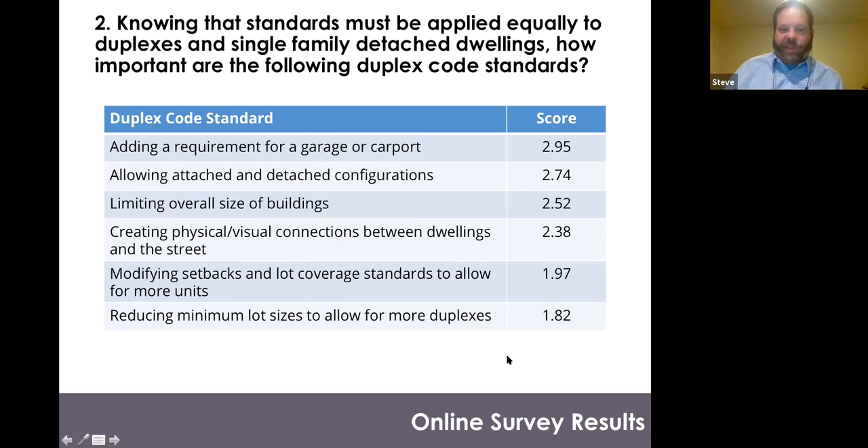Third, limiting the overall size of buildings falls somewhere in the somewhat to important range for people. On the bottom end of our scale, modifying setbacks and lot coverage standards to allow for more units, and reducing minimum lot sizes to allow for more duplexes. So there's a bit of conflict in that we're hearing the desire for more affordable housing, but not for changing standards to allow more units on parcels. We'll see these themes going forward.

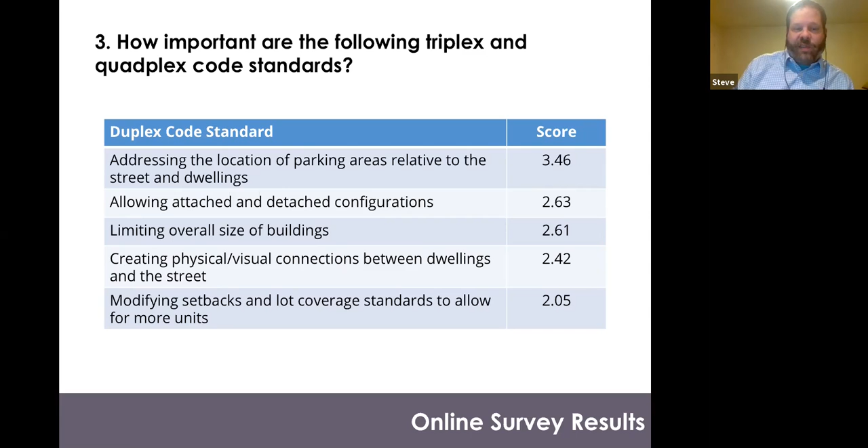Number 3, how important are the following triplex and quadplex code standards? Again, at the top, addressing the location of parking areas relative to the street and dwellings - where are parking areas relative to the street and relative to dwellings. Less important, allowing detached and attached configurations and limiting the overall size of buildings. And then towards the bottom, the least important, modifying setbacks and lot coverage standards to allow for more units. We're seeing some themes emerge.

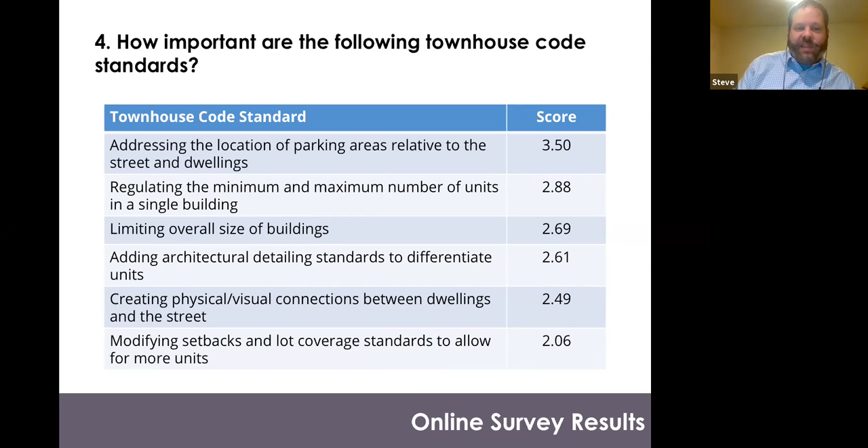Townhouse code standards. Again, far and away the most important code standard is addressing the location of parking areas relative to the street and dwellings. Also, here's a new one we had for townhouses: regulating the minimum and maximum number of units in a single building. And again, limiting the overall size of buildings. Way down at the bottom again, modifying setbacks and lot coverage standards to allow for more units. Let's go to the next one, Elizabeth.

Cottage cluster code standards. Again, with a score of 3.5, providing options for shared parking or parking close to each cottage - so where is that parking located relative to the units. And then down towards the bottom again, modifying setbacks and lot coverage standards to allow for more units. Somewhere in the middle, things like orienting cottages around a shared courtyard, limiting the overall size of buildings, creating physical and visual connections between dwellings and the street. I think that's the last one.

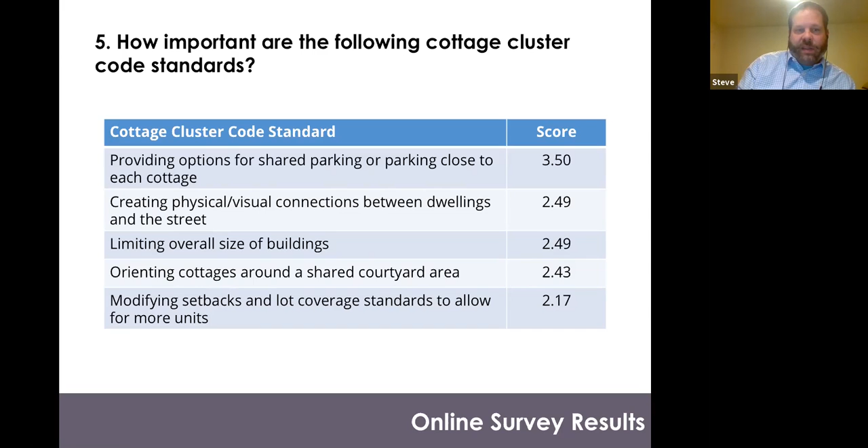So, I would just say before Elizabeth starts, in summary, we always are dealing with tensions in how people feel about these issues. While we see that there are many people for whom providing more affordable housing options is important, they're also very concerned about how that's done, particularly how parking is accommodated for these newly allowed units, and being thoughtful about how many units are allowed or what changes are made to the code to allow for more units.

Heather, Elizabeth, you looked at these results as well. Is there anything else that jumped out at you in terms of themes that I might have missed? I think you nailed it as far as parking being the thing we heard the most about. And then in the comments also, which were numerous, parking came up more than anything else. But I think you definitely, from my perspective, gave the gist for sure.

Yeah, the only thing I would add is that we used the survey tool as an educational tool as much as anything. So what you don't see in these results is all the background information we shared about each of these housing types. Even beyond the specific answers we got, what we were really hoping came out of this survey, and why we're glad 192 people took the time to go through it, is that they're that much more familiar with what middle housing is and what we need to do.

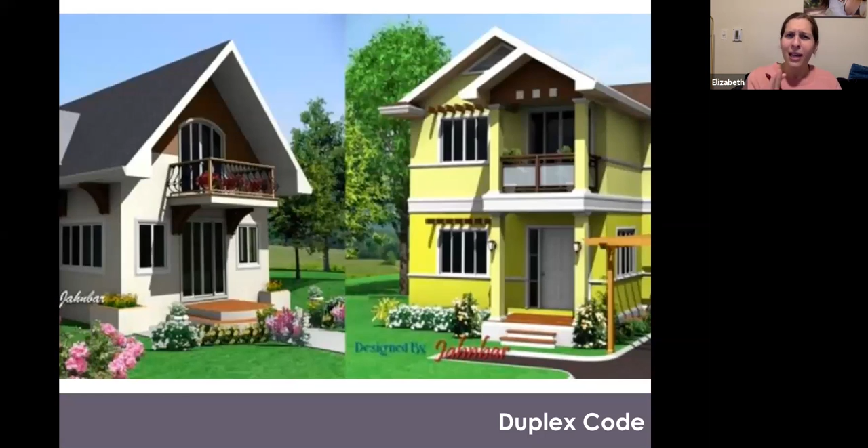I apologize, it's actually really hard to find graphics explaining this difference. So on the left you see 1.5 stories compared to 2 stories. We're talking about imagining a whole extra story underneath this, but you can kind of see the difference if you focus on the top here. The one on the left, the reason I included it is that it kind of gives you an idea what a quote unquote half story looks like, because it can be tricky to imagine.

It's like that movie Being John Malkovich, where they have that weird in-between story and everybody has to bend over. It's not like that. It's more just about using some of the space under the pitched roof, so you don't necessarily have the full story in terms of the floor plate. You have just the inner area under the tallest part of the roof, compared to, say, on the right, where you've increased the height enough so that there is room for a full second story that has the same floor plate as the first story.

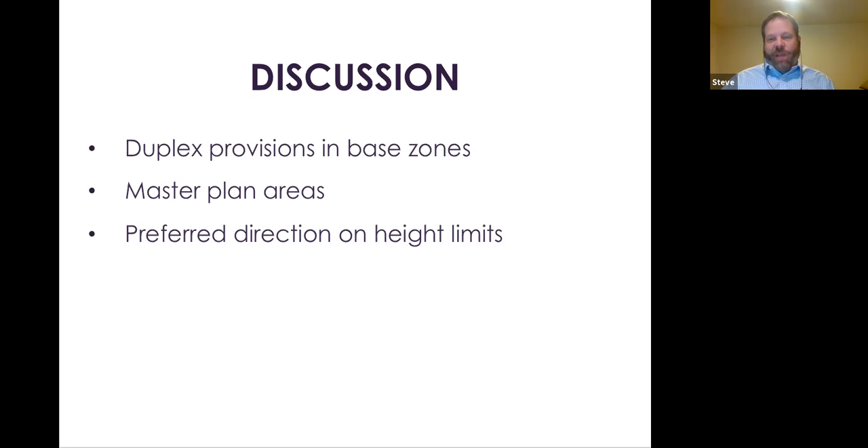If no one has any comments that they jotted down during the presentation, Elizabeth, maybe we should go back and just walk through those slides and see if people have any questions or comments on each one. Sure, anybody want to start?

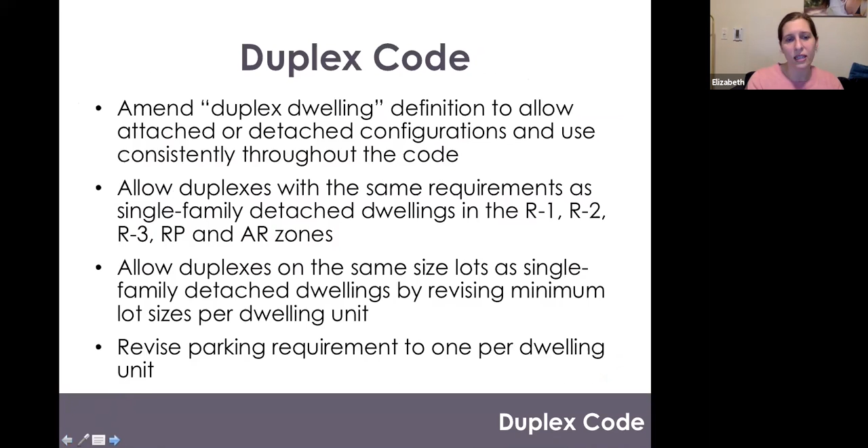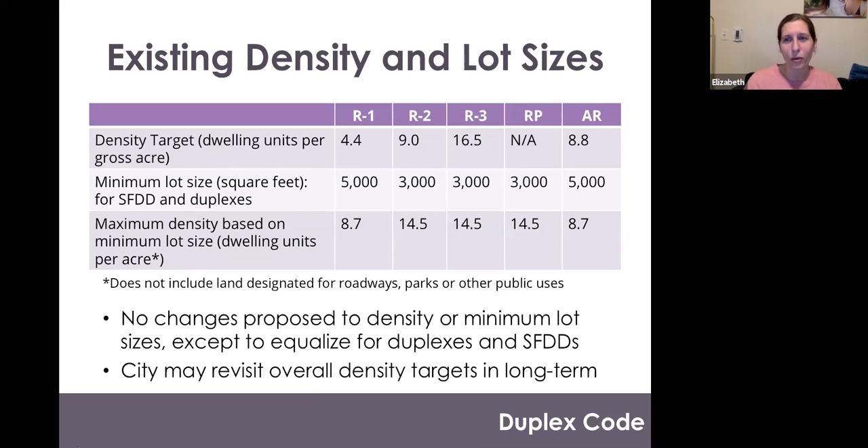Just the basics of where we're going to allow them, the lot sizes, and the density issue. I know this is kind of complex, but we put it in just to show we did the work. The answer is really in this middle row here: the minimum lot size for duplex will now be set at 5,000 square feet in R1 and AR, and 3,000 square feet in R2, R3, and RP.

So, Elizabeth, I might just chime in if I can. Please do, if that's okay.

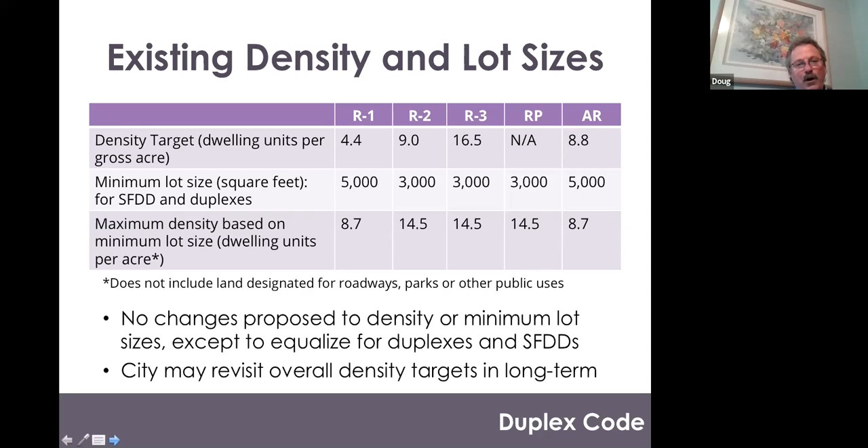For the committee members, think about if you were in R1, what we're typically seeing is homes in the 2,000 to 2,400 square foot size. They are meeting our lot coverage requirements for the home and the driveway. Now imagine if you had a duplex on that same 5,000 square foot lot. You'd effectively have a duplex ranging from 1,000 to 1,200 square feet per unit, instead of a 2,400 square foot home, if you're considering the lot coverage piece. We're not getting into the design piece, but that's a way to contextually think about what that building envelope might look like in the future. And of course, designers get really creative about what they look like from the street, that curb appeal.

Okay. Anybody feeling brave and want to talk about the master plans?

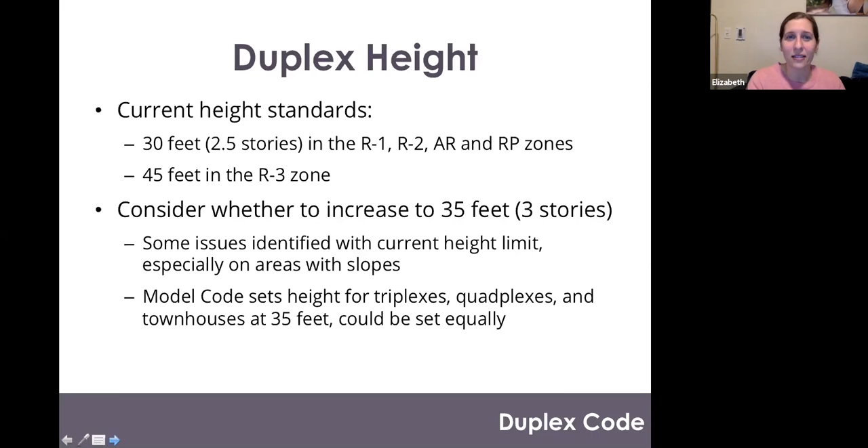Okay, I'm trying to understand all this. The reason for a height maximum is, I live in Oak Knoll in Newberg, and I know that since we're all on a hill, if somebody builds taller, you ruin someone's view in the back, right? I assume that's the pushback for why there's a height limit. Is that part of the reason?

Yeah, that's definitely part of it. And also a sense of literally overshadowing people's backyards. So height limits are about controlling that building envelope and keeping it at a, quote unquote, traditional neighborhood scale.

But raising it gives the developer more options, maybe more affordable housing options. It's interesting to think through whether it would actually be more affordable, because in some ways, if you added an extra 500 square feet of living area, it could actually be less affordable, since it's more house. But it could make a project pencil that wouldn't otherwise pencil. I don't know what the market is for 1,000 square foot duplex units. Maybe they'd make good rentals, maybe people would want to buy them as a condo or something. I really can't speculate on that, but I think the idea is just that it would add more flexibility and make projects at a variety of price points more feasible, keeping them within that overall lot coverage that's already in the code.

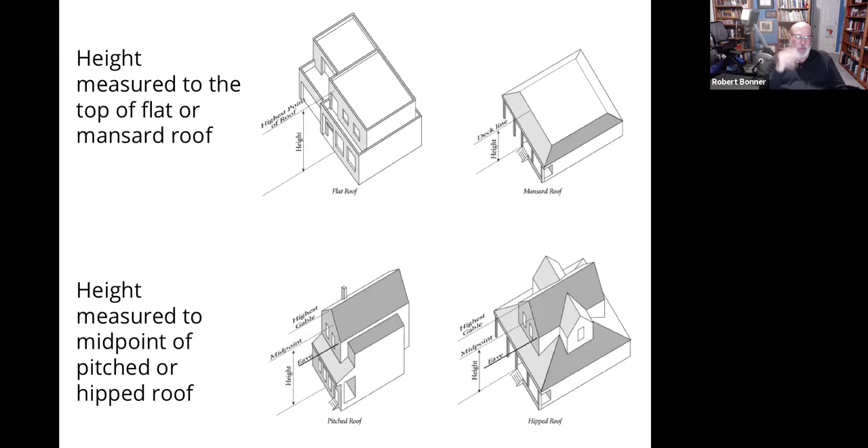Yeah. Well, see, as I'm looking at it, if we allowed a 35-foot roof, as we do in some residential areas, one of my concerns is that we would see more of the higher end housing rather than the affordable housing that we'd want. That's just a concern.

Yeah, it is worth considering. I think we can look and see if there was any work done on this at the state level about potential impacts on sizes and prices, and get back to you on that.

I think the difficulty in writing zoning code is that we want to nudge people in the right direction, but the zoning code isn't a great tool for that. Sometimes we maybe want to restrict something in the hopes that people pick this other option, and it might work, but if it doesn't work to develop those smaller duplexes for financial reasons, we're not going to convince anybody just with the zoning code. We just might cut off any hopes for duplexes.

Again, I'm not saying that's what would happen if we kept the 30-foot height limit. I really don't know, so I'll see if I can find any more financial details about that. I know there was modeling done, particularly on triplexes, that had to do with the total amount of building area. That could be useful and relevant here.

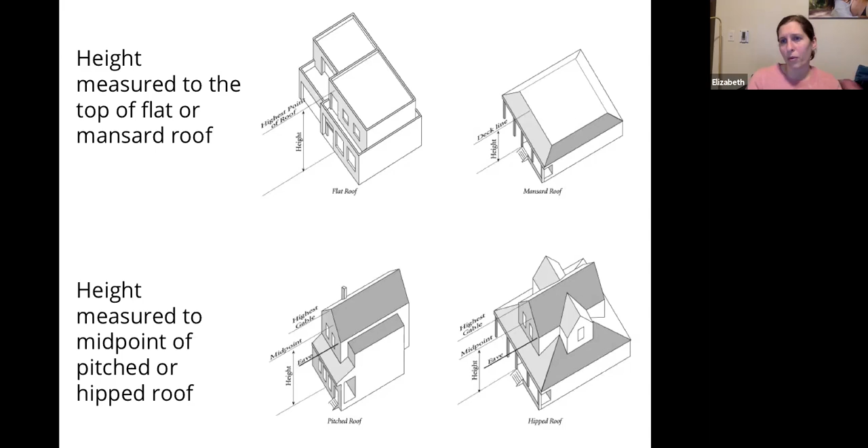Another thing I'm thinking, and I don't want to get into this in detail now, but maybe something Doug and I could follow up on is how we measure height—whether it's from average grade, highest grade, or lowest grade on site. If the biggest issues seem to be moving up the slopes, maybe we could look at how we set the grade from which height is measured and change some of the definitions to address those areas more specifically. That could have more limited impacts on infill sites, for example, where the height limit wouldn't necessarily change and could be less affected.

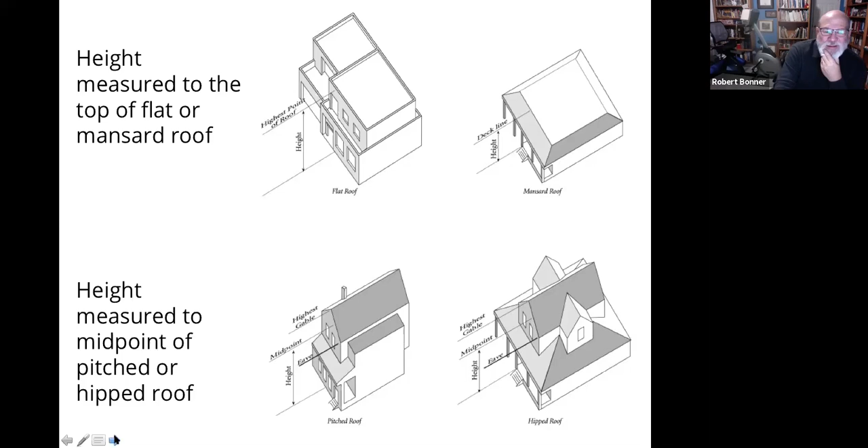And if we look at it, 5 feet is not much difference between 30 and 35 feet. Right, the 5 feet is not the difference, but the third story is the difference. It only takes 5 more feet for most residential developers to get a full third story, which can be a big change in terms of visual impact from a 2-story development.

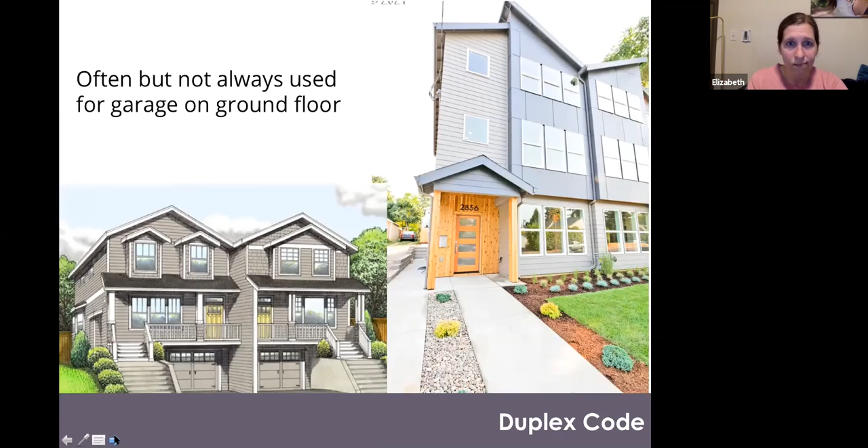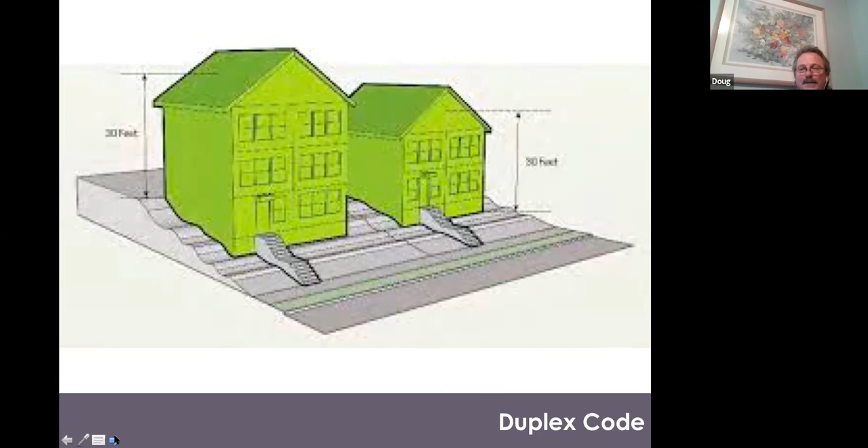Elizabeth brought up how we measure, and currently our building code, the Oregon Structural Specialty Code, has a definition on calculating structure height, and what we use in our code is that same methodology.

Okay, well, any more thoughts on height limits before we move on? I'm hearing a lot of interest in really thinking through how it could impact housing. That's what's exciting about zoning—not just the numbers we put down on paper, but how it impacts development on the ground.

Okay, let's let that percolate and move on to design standards for other middle housing types. What you had in your packet was the draft code for duplexes. As we explained in the memo, that code needs to be adopted in a separate package before June 30th of this year, so that will finalize based on some of this input and further discussion with Doug. We'll bring it back to you to confirm, but that's pretty well set.

Now we really get to the bigger piece of the code work: bringing in the other middle housing types. We'll do that as a separate code package that goes on top of the duplexes, adopted through a separate process after June that the city will be leading. I think the target date is fall, but none of us have to hold Doug to that.

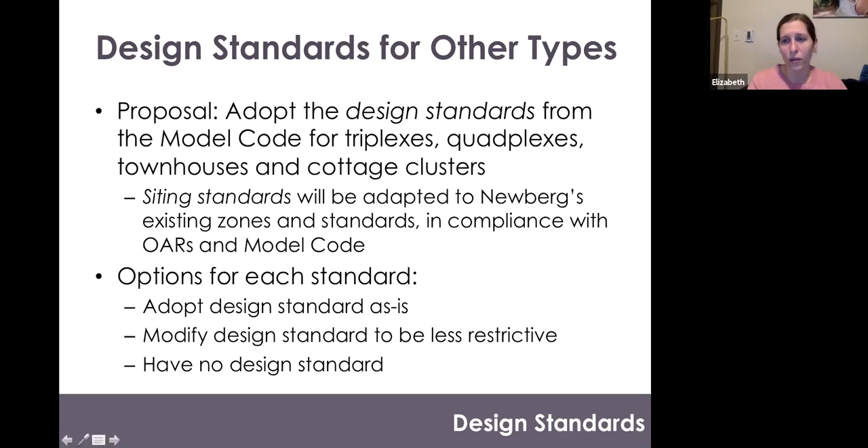So we're not necessarily going to recommend this final option of having no design standard, but we just want to say it's certainly out there if you think anything is too regulatory. Okay, so we'll start first.

Our goal is really just to walk through these tonight, get your initial feedback, and then we'll use them to shape that draft code—so you'll get another chance. For triplexes and quadplexes, we're going to be looking at entry orientation, minimum window coverage, garage and off-street parking areas. We certainly heard in the survey how important that is.

So we'll talk about the ability through the model code to regulate those, and related is the driveway approach piece. Okay, so these diagrams that I pasted in here are from the model code.

These address the entryway orientation. What the entry orientation standards say is basically you have three choices. Your main entrance can face the street and be less than 8 feet setback from the main facade of the dwelling. That sort of helps these new dwellings pass what I call the trick-or-treat test—can you find the front door in order to knock on it, in order for your kids to knock on it to get candy on Halloween?

And if it's set too far back or tucked around the back, that house does not pass the trick-or-treat test. So they think that if you don't set your door back by more than 8 feet, you'll pass. The other option here is to have your main entrance open onto a porch, and then the entrance itself doesn't have to face the street as long as the porch is facing the street.

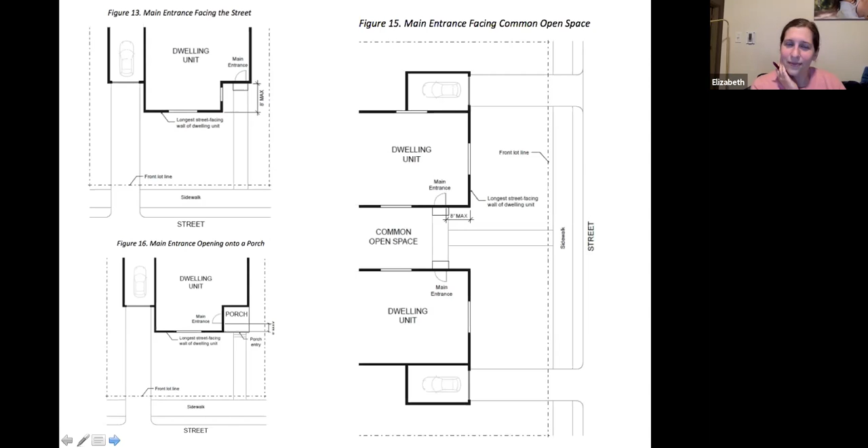The next piece is window coverage for triplexes and quadplexes. My biggest beef with this particular diagram is that the total window coverage they're showing appears to greatly exceed 15%, so I think it's a little misleading. But the point is that all of the street facing facade, you define that facade area, and of that, up to 15%, you can set the minimum for window and entrance door coverage requirement.

So again, I think this is pretty reasonable. 15% for residential uses, it's not very common to exceed that because of privacy concerns. Things like, what if you have a bathroom on that wall? You don't want a picture window necessarily. So I think this is pretty reasonable.

Just for comparison, we don't apply any minimum window coverage to single family or duplexes, and we see generally sufficient window coverage for those. So I think this should be relatively easy to meet. But it still serves an important public purpose, making that visual and physical connection to the street, adding some eyes on the street, and just neighborliness.

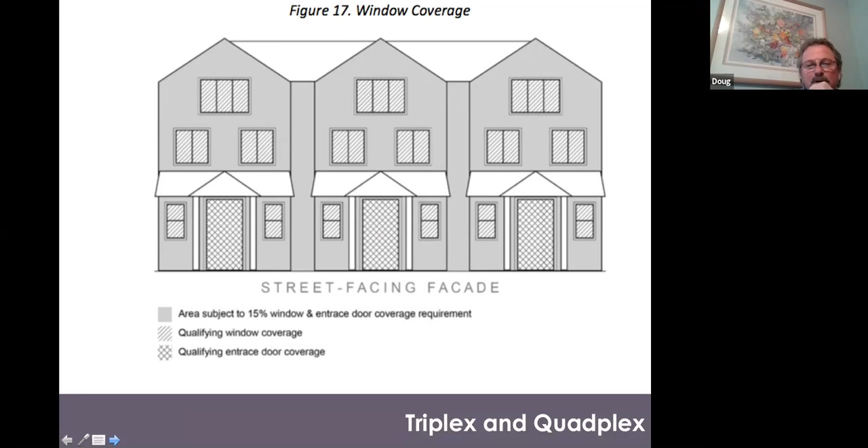Yes, and the other thing I was thinking, when you have the attic style top floor, you can always use sunroofs. Is it? Yeah, skylights or whatever you call them. So yes, that's how to get enough daylight in.

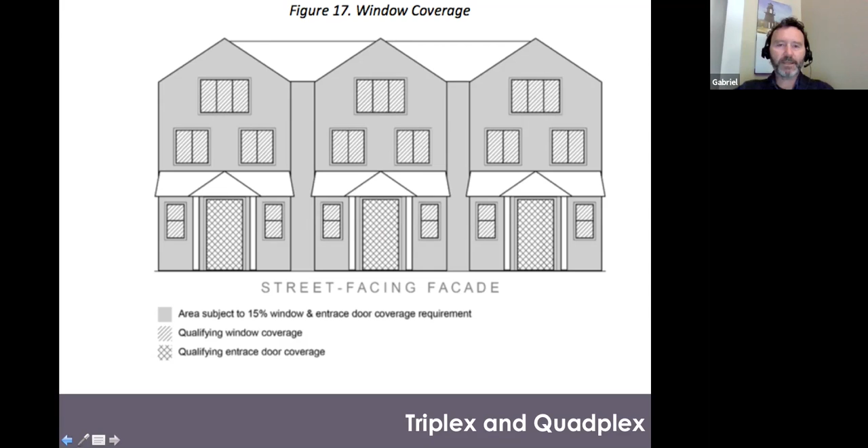Okay, and then we get to the width of garages and parking areas. This definitely ties into the concerns about whether parking dominates the site. It's a fine line, since we've heard this desire to make sure that all of these units have parking.

And again, spoiler alert, we'll probably be drafting the code to have 1 parking space per unit be required for these types, which is the most that can be required under the state regs. But if you are going to require that parking, it needs somewhere to go, but still without dominating that front facade. When you get into that window coverage, you still want to have opportunities for windows facing the street, and you still want to have the entrances facing the street.

So to balance that, the model code standard is that the combined width of all the garages and driveways on the site, represented by A1, A2, and A3 here, can't total more than 50% of the front facade of the total street frontage, or lot width, on the property line. So that's the balance that they've come up with.

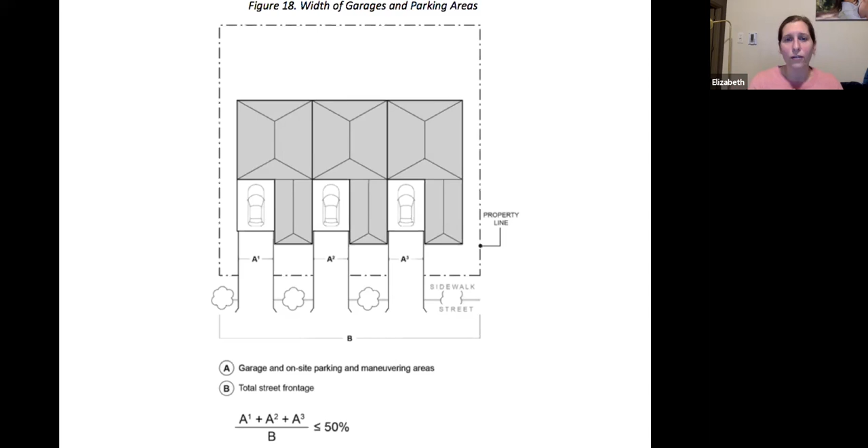So I think here, if you wanted to be less restrictive, you could allow for more driveway and garage coverage, but not less. The idea is that 50% balances the feasibility of providing these parking areas against requiring as much of the unit itself and the entrances to be up near the front of the property.

And I would say, I think that fitting these driveways in is going to be one of the key challenges for sites. So I think this could be a really important driver of site design.

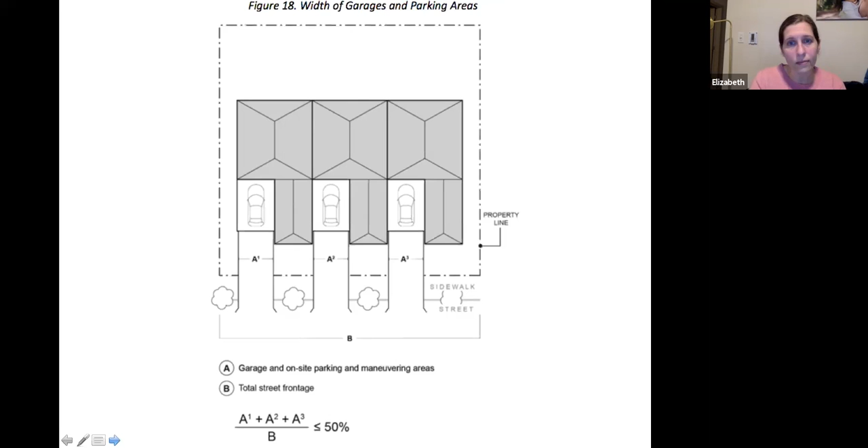Okay, and it is related to how wide the driveways can be at the street. In many cases, like in this diagram, the width of the driveway on the property and the width of the driveway opening are going to be the same. But sometimes you see a narrower width at the street that flares out to a double wide driveway on the site. This standard is particularly concerned with the width of driveways at the street and works in concert with the previous standard. What this says is you cannot exceed 32 feet combined of driveway access onto the local street per triplex or quadplex.

So 32 feet per frontage - I don't know if you could actually fit 4 driveways with that, more like 2 16-foot wide shared driveways, but that is the recommended standard.

I do have some questions here about whether Public Works would allow this, to have 4 separate driveways from one lot accessing the street. A lot of city codes don't permit that. So I think here's where we're going to need to think about whether shared driveways need to be either mandated or heavily encouraged by limiting some of the other options. But this is what the standard is initially promoting.

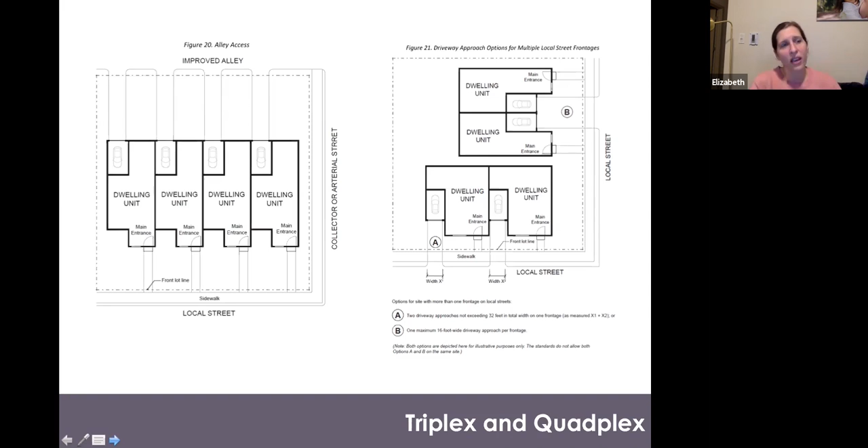Sure, so the reason that it's different is because there's different ways to answer the question. My first answer is because Newberg doesn't regulate how wide garages can be for single family detached homes, it can't regulate how wide they can be for duplexes. The idea is that those two types are supposed to be regulated the same. So perhaps this prompts the question that maybe you would like to add, or at least look at some regulations for single family homes and duplexes about how wide garages could be as part of the facade. But that's why we were constrained there.

But as we get into these other housing types, DLCD and the rulemaking committee recognized that there are different design challenges that come with these plexes. And so the design standards that are in the model code are really additional tools that they're giving to the cities, saying, hey, you can add these additional standards. You don't have to apply these to your single family homes, but you can apply these to your plexes, because we realize there's going to be more challenges, so that you have a way to try to address the compatibility issues.

Yeah, so in our code, it's kind of a quirky thing, and maybe we can fix it through this process to some degree. If you go to our definition section, it says that a double car garage has to be 20 feet by 20 feet, interior wall to interior wall. For a single car garage, it has to be 10 feet wide and 20 feet long, again from interior wall to interior wall. It was an odd thing when I first got here and I looked at that, because people have missed it, and there's a question about whether some single car garages in either single family or duplex developments meet those standards or not.

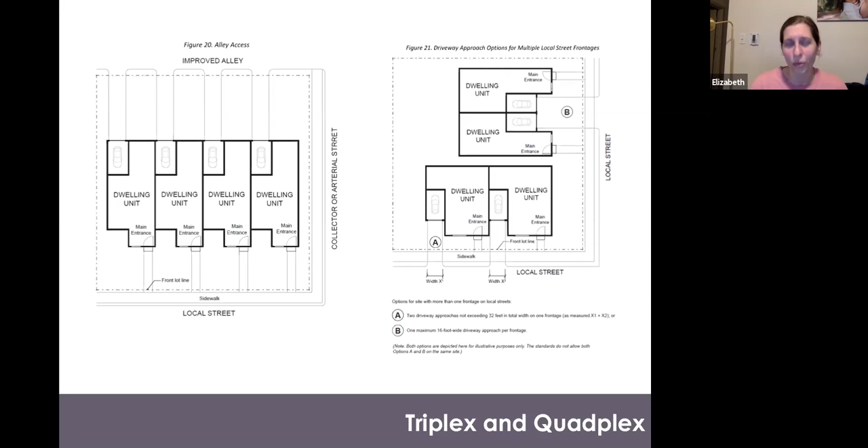So model codes are good to a point, but there are lots of nuances that come in with them. But the point is that there could be alley access - the model code is taking a stand that cities cannot require only alley access as an option for these sites because of this whole cascade of impacts. So it's an option if you want alleys, but it can't be the only way to develop these sites because of all those issues.

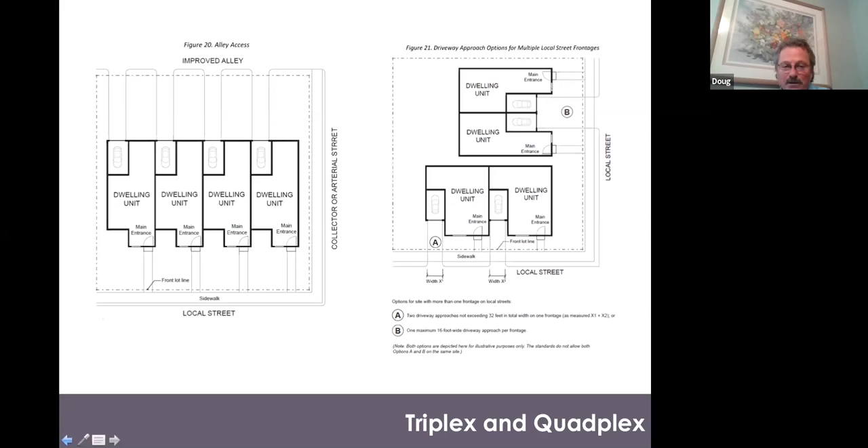We also have to take into account vision clearance triangle requirements at street intersections. The code currently has some driveway separation distance requirements, which is part of our engineering side, so we'll have to talk to them about that, and whether we need to make modifications for triplexes and quads.

The last piece before we move on is the spacing of these driveways when we talk about parking. We do want to get this off-street parking that we'll require, but the more driveways you put, if they're too close together, you completely eliminate any on-street parking - so it's really a net zero gain of parking spaces if you do it wrong. We'll want to look at ways to maximize both retaining on-street parking while getting this off-street parking.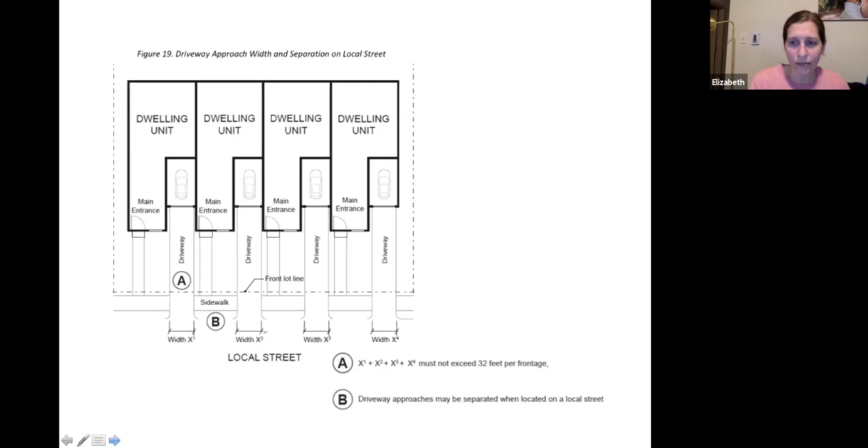Okay, I feel like we've talked about some of these issues already, but one more discussion point on plexes before we move on.

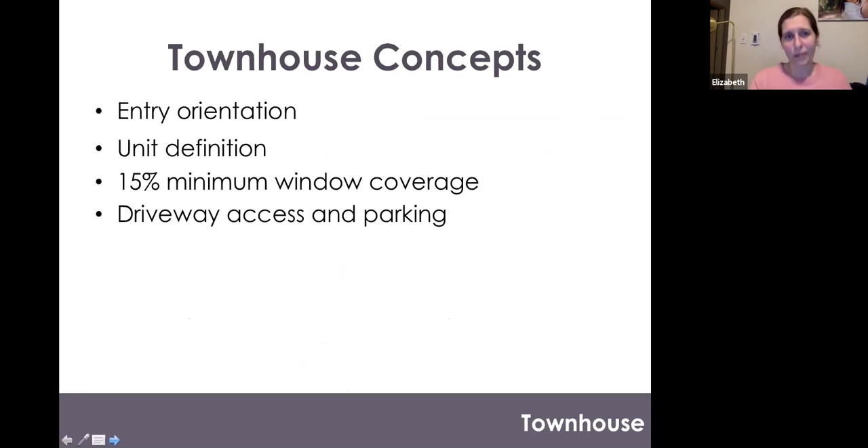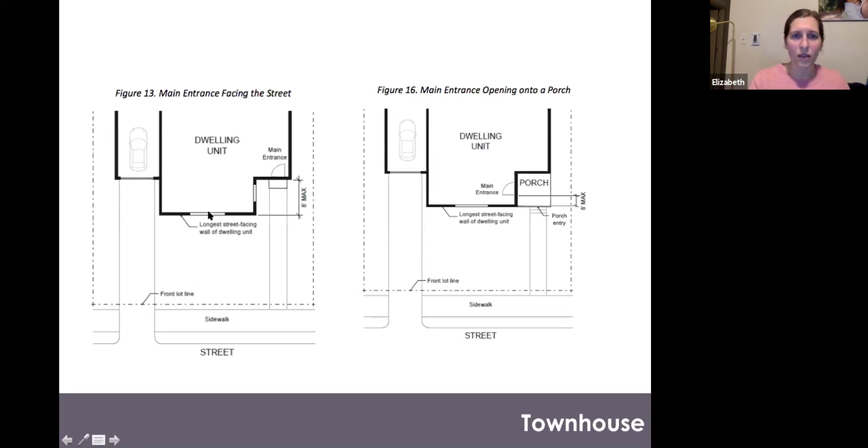Let's get into townhouses, which are actually pretty similar, so you guys can start to feel like experts. As we saw in that visual tour, a lot of townhouses look pretty similar to side-by-side attached triplex and quadplex units, so very similar design issues. The entry orientation has the same standards - you can either bring your entrance up within 8 feet of the street-facing facade, or open onto a porch.

This is where you get a little bit of an opportunity to regulate bay windows and things like that - there's an option to require one unit defining feature per townhouse, and they've listed them out, A through G: roof dormers, balconies, bay windows, facade offsets, etc. So we'll add this menu approach, and each unit can have one. In the diagram, several units have more than one, so that's certainly permitted, but you can only require a minimum of one.

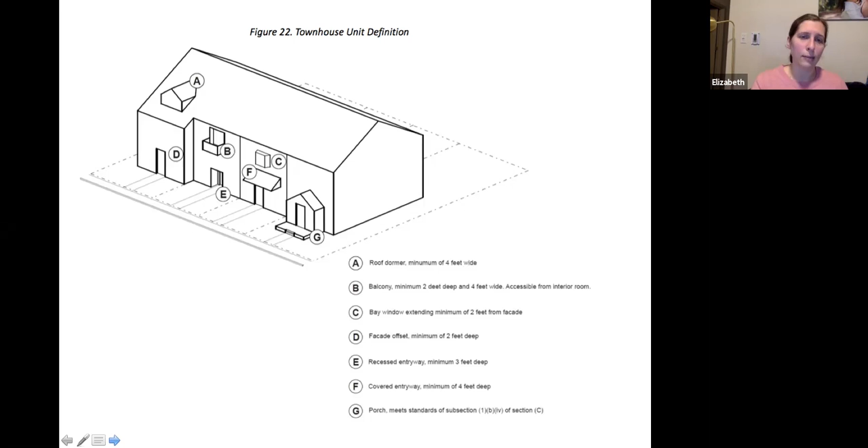Then we've got the same window coverage, same drawing in fact, about 15% for the townhouses. And then we get into very similar parking issues. The difference is that because they're on individual lots, sometimes the engineering standards are different, because a lot of times each lot is guaranteed one access. So that's how the model code approaches townhouses.

Similarly, some cities have said - I've certainly been in cities, or worked in cities, back in the day I used to actually travel to cities - there's certainly city codes where they say if your lots are below, say, 30 feet wide, you have to have alley access.

And that triggers that whole cascade of impacts and costs that we just talked about. So what the model code is saying is they want to guarantee an option for street access to driveways and parking. And what they're saying for townhouses, to maximize feasibility, is that any lot that's at least 15 feet wide, which is probably going to be most of the lots,

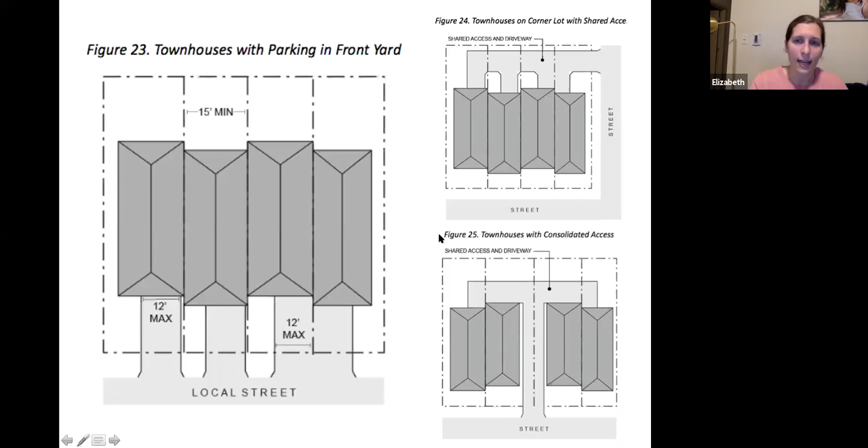So there are, of course, a few other options. If you're on a corner lot, these ones on the right here, there are some options for shared access or a consolidated access way. But these ones can only be required if the lots are less than 15 feet, which, I don't know that we're recommending any lots reducing the minimum lot width below that.

Okay, so thinking through there, any questions, comments about these, either modifying or limiting any of these standards for townhouses?

Okay, well, I think everybody's overwhelmed, Elizabeth. It is so much. So again, this is your preview. So, anything you want to say now helps. And even if it's just a question of, wow, that looks great, or that sounds terrible, or how is this going to work? Any of those are welcome right now. But also just to give you a preview of what we're thinking as we're interpreting this.

Last one to go through with you is talking about the cottage clusters. And these are the challenging one, just they're always the last in the series. And I think, frankly, even the model code, you can sort of tell that people got tired by the time they got to cottage clusters. And it's the most unlike the other housing types. So as you can see just from this list, there are the most options for design standards here.

And I do think that most of these pieces are going to be important to make a cottage cluster work. But I would just also, as an overall caution, remind the group that cities that have had cottage cluster standards in the past have generally overregulated. That has led to the production of zero to few cottages. So I think the model code has done an admirable job on cutting back, but there could still be some opportunities to be selective about some of these pieces.

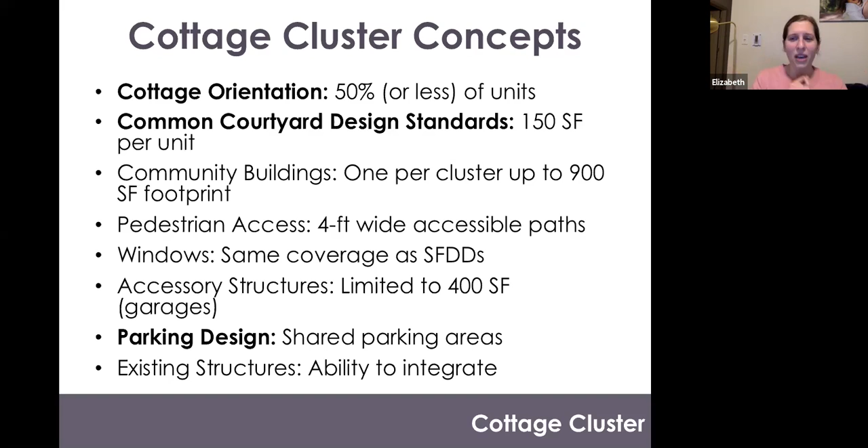Then the last piece is the parking design. The model code started, as the conversation went, by requiring parking in some shared parking pods, separate from the individual cottages, and they have relaxed it a little bit to envision more what it would look like with garages for each cottage. We'll get into exactly how feasible those might be.

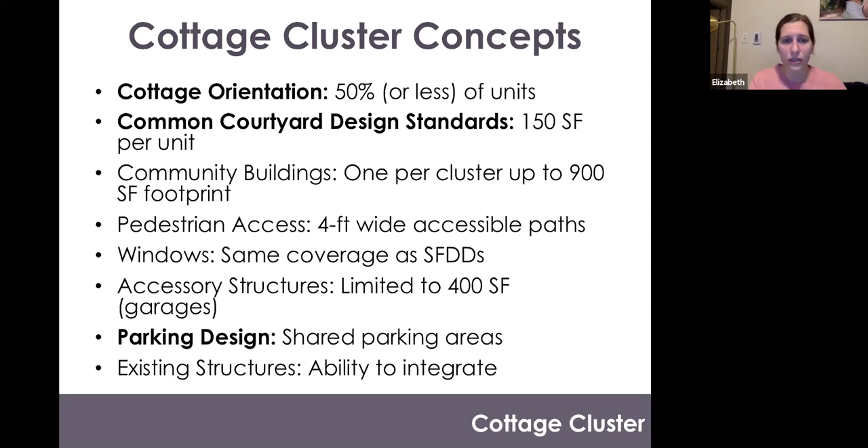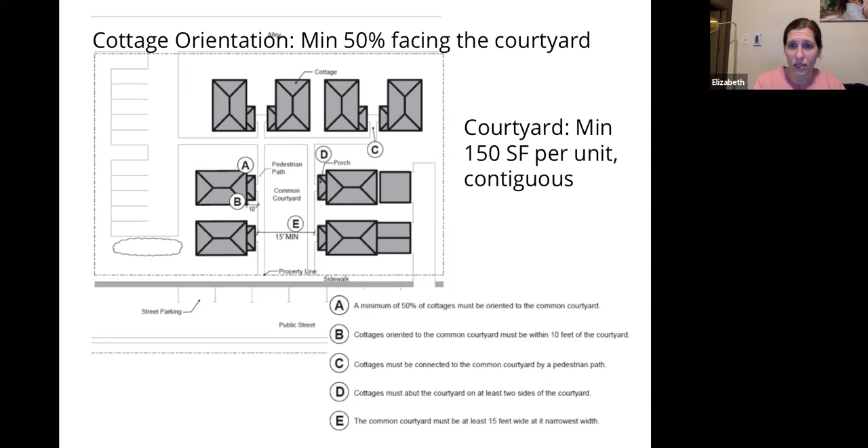Now to talk about the parking. The piece on the left is this shared parking area with individual parking spaces. In this case they're surface parking spaces, but it could be a carport structure or a shared garage instead.

The model code has what I think are fairly restrictive standards on how these have to be arranged, which could really eat up an awful lot of site area and decrease feasibility, cutting into the density that could be achieved otherwise with these cottages. First, you can only have 5 spaces before you have to have a landscaping buffer, which is pretty restrictive—a lot of codes for other types of parking lots allow at least 10 or 12 spaces before you need a landscape buffer.

It has to be set back 20 feet from the street, screened with landscaping, and set back 10 feet from any side property line. All those pieces are great in terms of reducing the visual impact of these parking areas within a neighborhood. But I don't think this diagram is to scale, and when you start thinking about how much land area is getting eaten up by buffers and boundaries around these shared parking areas, I really have to question how feasible it's going to be to site these.

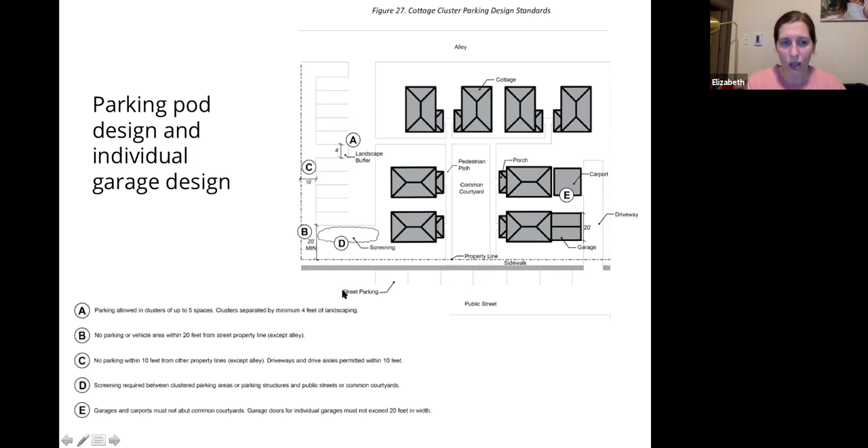Okay, Mom, the phone's not working. It's not on its side. All right.

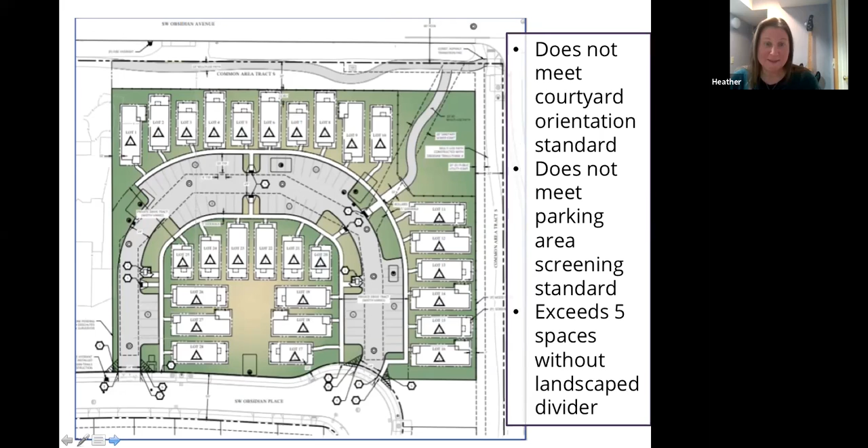And here parking is also a lot closer. We've heard it's hard to get your groceries to your home when the parking area is all in the bottom right corner and you live in the top left corner. So having parking dispersed throughout the site can be really helpful to residents as well.

Great, good coverage, Heather. Thanks for that pitch hitting.

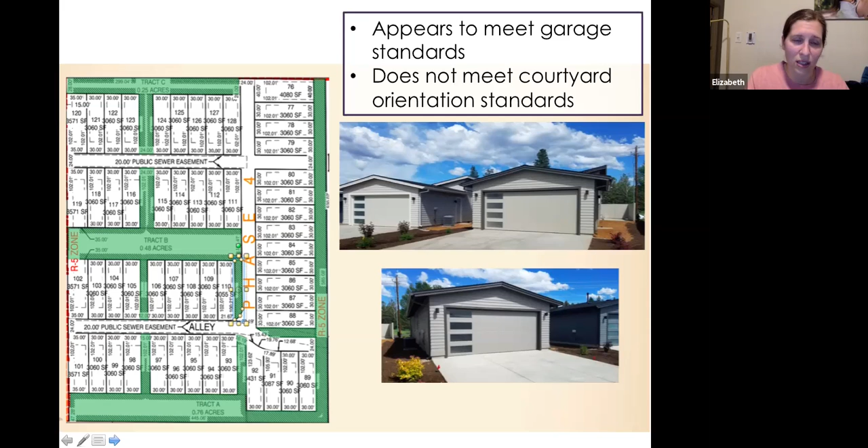So we'll turn it over for anybody that isn't completely exhausted thinking about code, for any more thoughts about cottage orientation, the common courtyard design, parking design, or any questions on these other pieces. I'm happy to talk about them, but I think they are less important in terms of feasibility.

I kind of feel like if what you're saying is that for these cottage clusters the courtyard is the point, for people to be facing into those or have easy access to that, then those last two examples just make things confusing. I'm all for flexibility, but why try to fit them into a box they're not? Maybe call them something else - they want more density, yet freestanding buildings, but it doesn't seem like a cluster to me. For people not going through this kind of process, it's going to be even more confusing. But maybe it doesn't matter - it's just the developers that need to understand it.

Yeah, I think you raise a good point. What are we trying to accomplish with these cottage courtyards or cottage clusters? If it's really just a small lot subdivision, that's not necessarily a cluster. HB 2001 creates this opportunity for cottages, and the model code helps set the direction, but Newberg gets to decide what's right for them. Is the common courtyard the heart of this dwelling type or not? Does it have to be as prominent as in some of these diagrams, or could there be a reduced focus on the courtyard and still a valid cottage-like housing objective achieved? Whether it looks exactly like some of those site plans or not is for us to discuss.

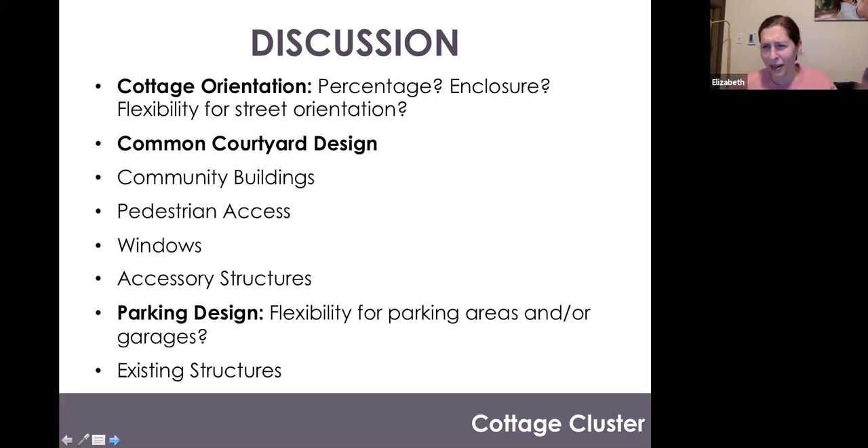All right, well, so we certainly have our work cut out for us in pulling together these various threads and putting together the design standards, not to mention those siting standards that we talked about. But we are looking at an exciting series of upcoming meetings. Steve, did you want to talk about this, or do you want me to? Sure, I'm happy to. You could probably use a break.

Thanks everybody, that's a lot of material, we know. We're doing our best to break it into chunks for you, and I think our team's doing a good job of that. But it's hard to get around the fact that there's just a lot of details for us to get into.

Doug sent you an email proposing that we move our next advisory committee meeting from February 3rd to February 17th. Doug, did you get responses on that request? I received 4 responses back that the 17th works. So in that case, we have a majority that can make the 17th.

Especially considering the issues raised towards the end of today's meeting, not only do we need to look at other middle housing, but also hopefully that gives us time to answer some of these great questions that have been raised throughout the meeting. So we'll look forward to meeting with you on February 17th from 6 to 8 p.m.

I would assume, Doug, there will be some sort of calendar invite heading their way soon. There will be an email for them to put a hold. Okay, perfect.